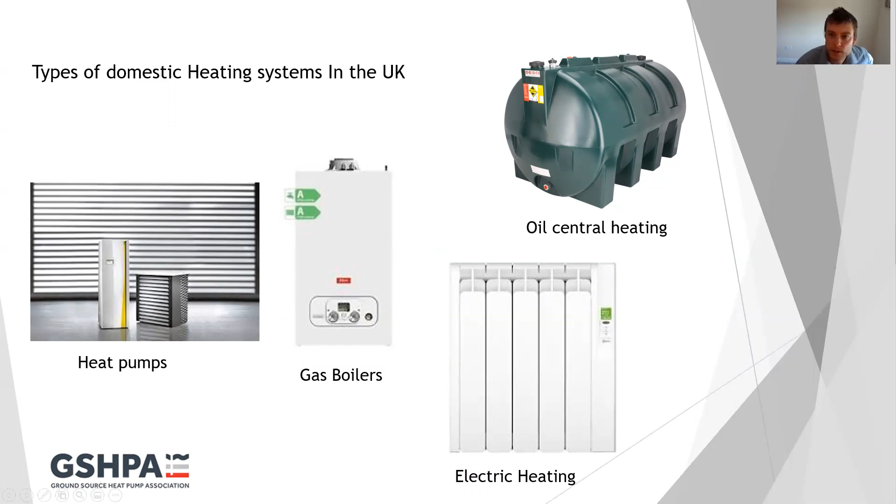Okay, how to ensure your heat pump is smart grid ready. So these are the types of domestic heating systems in the UK generally. So we've got gas boilers, gas and LPG boilers, heat pumps, electric heating via direct panel heaters, and oil central heating. This presentation is mainly to do with the domestic sector, but it can be carried over to industrial or commercial sectors. The principles are very much the same.

So this is just a little bit about how heating systems compare with regards to efficiency, so we can put them all on a level playing field. We've got gas and oil boilers. You put 1 kilowatt in. If they're an A-rated boiler, you'll get approximately 0.9 kilowatt of heat out, so they're 90% efficient. Electric heating systems, such as panel heaters or storage heaters, you put 1 kilowatt of electric in and you get 1 kilowatt of heat out. So they're known as 100% efficient.

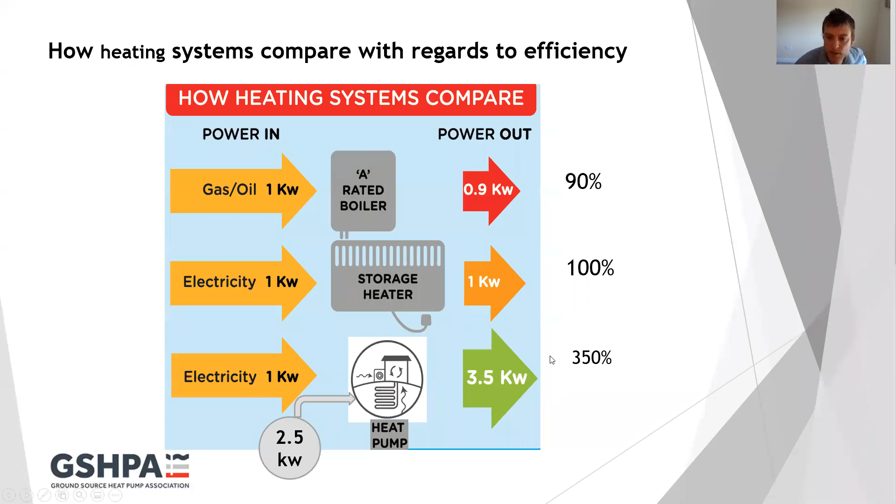And then lastly, we have electric heat pumps, where you put 1 kilowatt of electric in, but because you get 2.5 kilowatts of free heat from the ground or air, you end up with 3.5 kilowatts of heat. So they're known as being 350% efficient. So that's their efficiency, but how do they compare with regards to running costs with each other?

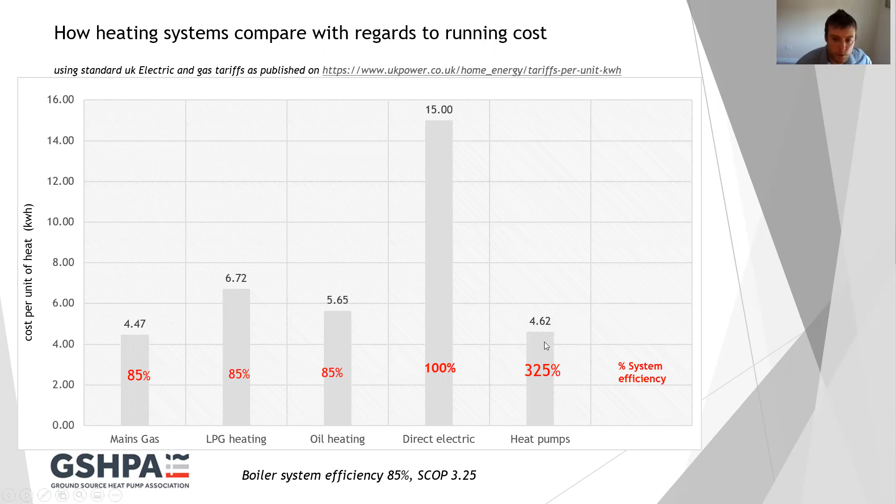So we have mains gas, which is actually the lowest form of heating cost, with a boiler efficiency of 85%. LPG and oil heating, for rural properties, tend to be higher. Direct electric panel heaters are by far the highest cost when looking at standard tariffs. And then we have heat pumps, even though they're very efficient. I've got a SCOP here of 3.25, which is pretty average. They're still slightly above a mains gas boiler, which is quite surprising. But that is to do with the cost of electricity and gas in the UK.

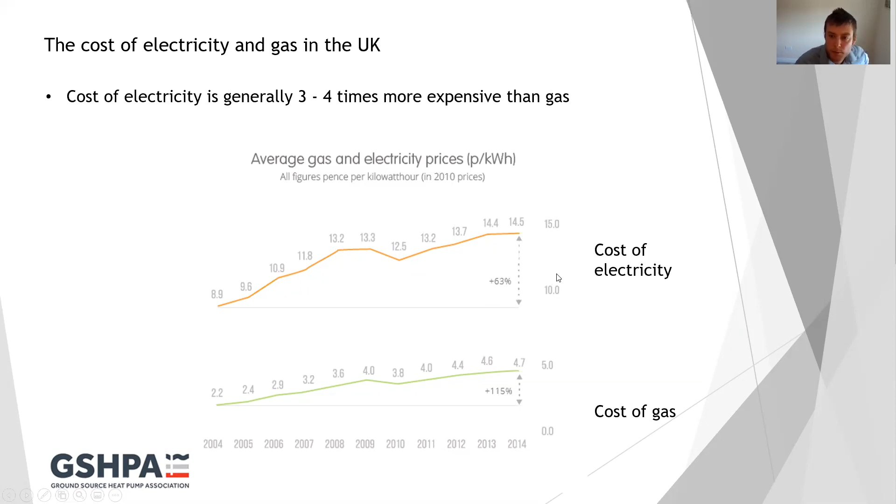So even though heat pumps are very, very efficient, because of the cost of electricity, we can see here, these were taken some 7 or 8 years ago, but the trend is pretty much the same. The cost of electricity has been, probably for the foreseeable future, 3 to 4 times more expensive than gas. So heat pumps lose out a little bit because the cost of electricity is so high. But what's changing in the UK? What's the future for the price of electricity?

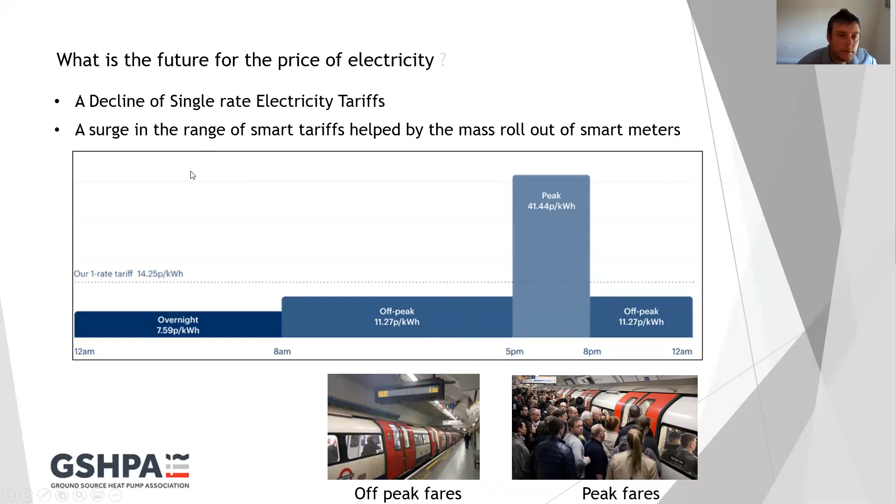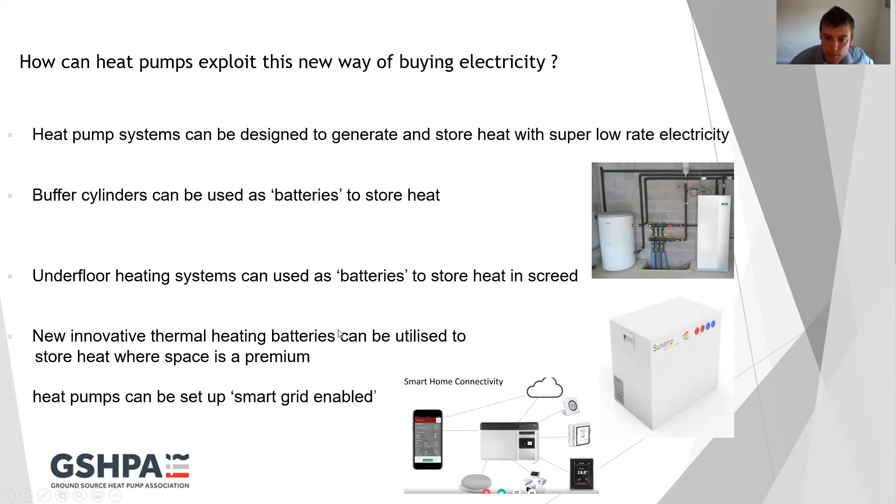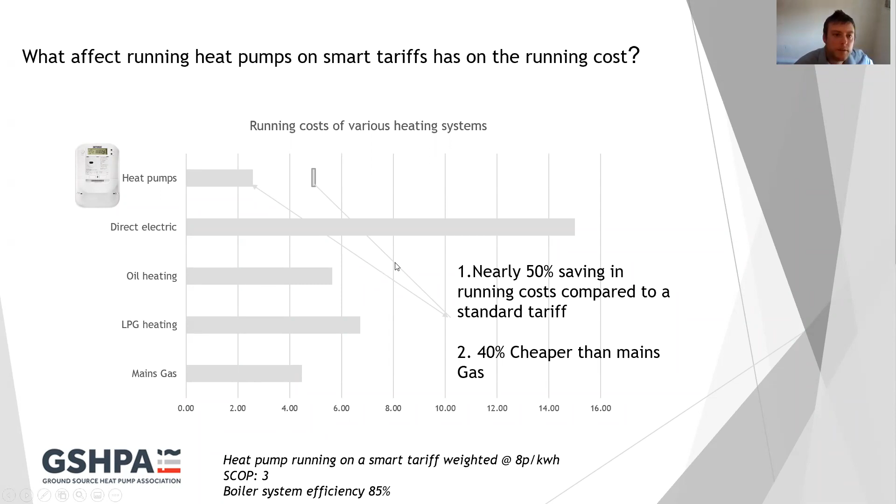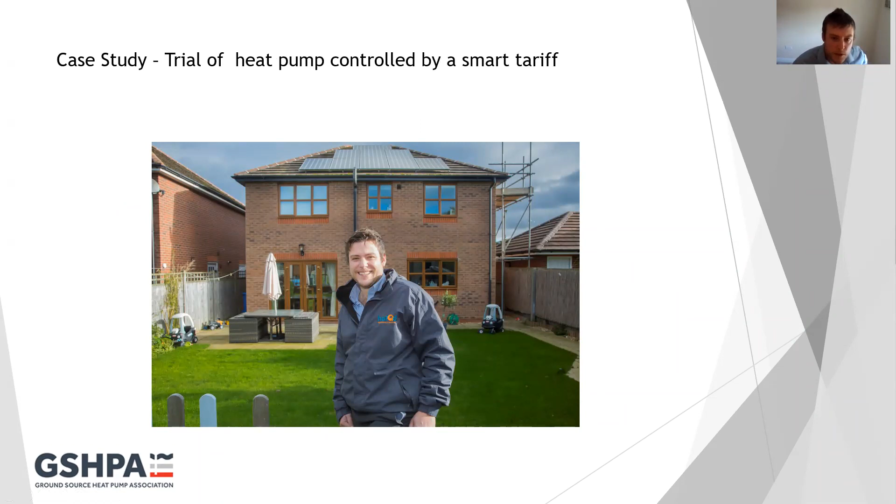So what we did, we put in a heat pump and a special retrofit underfloor heating system, so there was no digging out the floors. So we needed to look at getting some sort of thermal storage in there. Radiators don't work so well with a store, but storing heat in screed is a very good way of storing low cost energy. So we fitted a 20mm retrofit underfloor heating system with this high density screed, and this is just to show you a quick example of it going in.

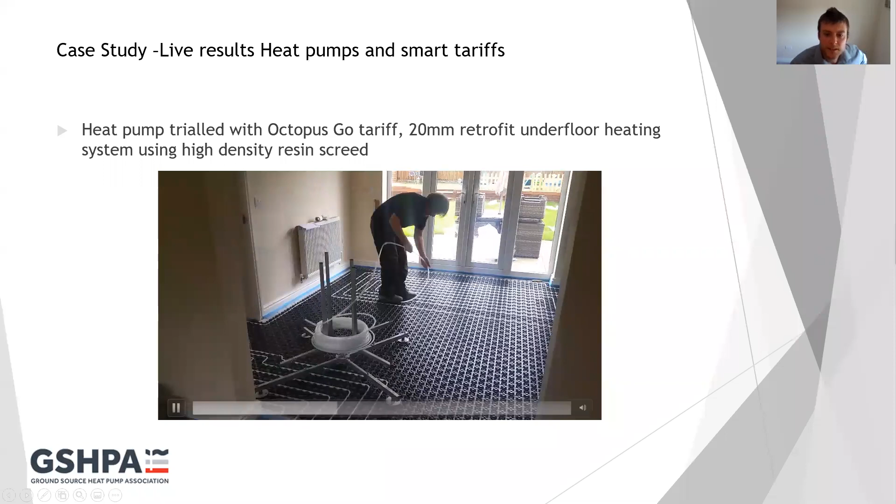Okay, so that's just an example of the underfloor heating going in, very low profile, just planing off the doors, and all of a sudden you have a very good underfloor and a way of using heat into a battery, a thermal battery type.

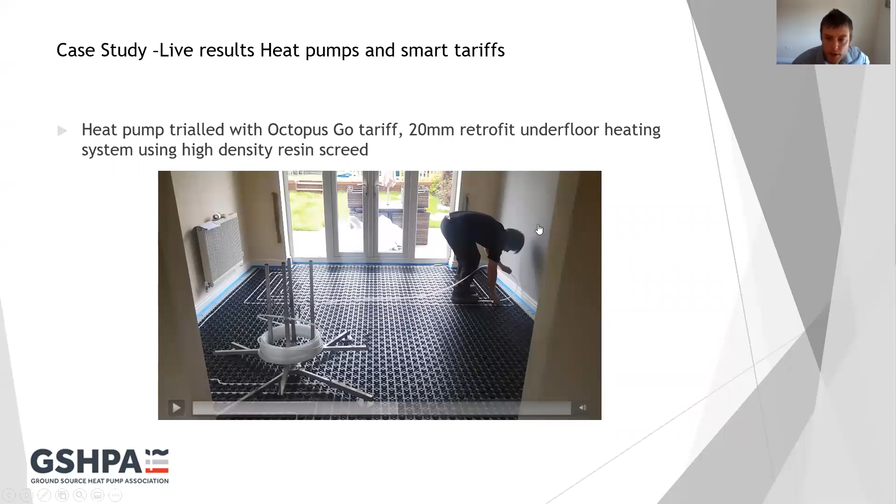So just a little bit on the screed now. So this one, by Ultraplan Maxi, is a very dense screed, so it can store a lot of energy, even at 20mm, which isn't much. If you see this example on the left-hand side here, so this is the idea.

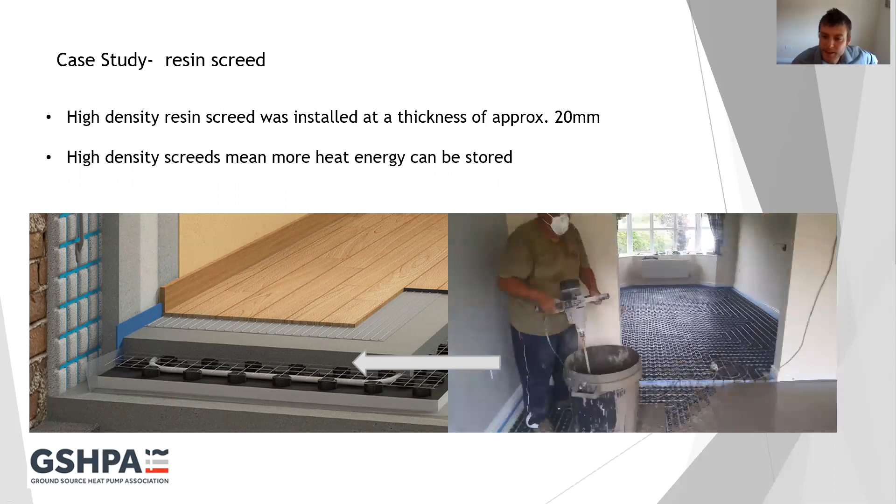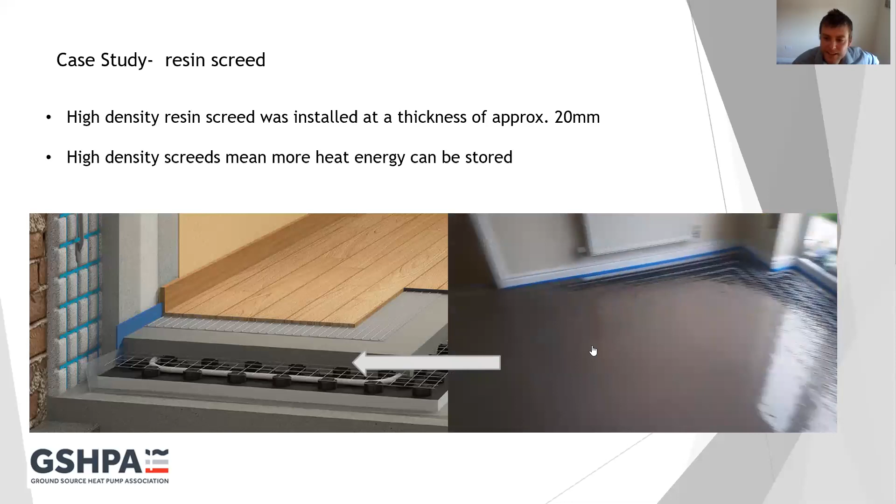We're running heat through a network of underfloor heating pipes, and in turn that is giving off its heat to the screed, which is heating as a slab, and then that radiates through the floor and into the room. And just a quick example of the type of resin screed that we install. It's mixed, and so it just gives you an idea of the job in hand. Only a 2-day install.

So these are the settings of the heat pump now, of how we use the heat pump to work with the smart tariff and with the screed. So what we did, we used Octopus Go, which is a tariff where it's 5.5p per kilowatt hour for 5 hours overnight from 1:30 till 6:30. So the heat pump is designed to charge up the screed in this low off-peak time. The peak rate on this tariff was nearly 15p, so it was geared up to use as much of the

low rate as possible. So we can see on this graph, this is what was happening when the cheap rate kicks in. The heat pump kicks in, heats up the screed, uses all the cheap energy at 5.5p instead of 15, so it's super cheap. But then, because that wasn't lasting the whole day, the heat pump was programmed to provide a further boost at approximately 3 p.m. in the afternoon, which we can see here.

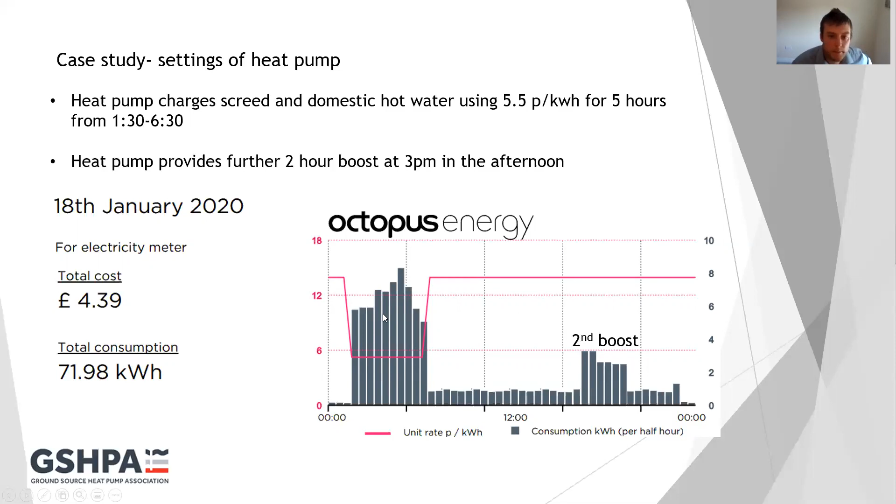This is the second boost of the heat pump using electricity to convert into heat to just lift the temperature in the house back up. And this was a day in January, 18th of January, so a pretty cold day. Some days the heat pump was able to just use energy here, but because of the heat loss in the house, they needed a second boost here. So this was using peak electricity, so 15 pence. But the idea is to use most of the energy here.

So this is just to touch on the comfort in the home and how it provided heat to the home. So this was a graph from the underfloor heating controls. So the orange is the average indoor temperature, and the blue is the outdoor temperature. So the aim of the game is to have the temperature at 21 degrees.

So what we're doing with the screed, we're letting the screed heat up to 22 and roughly fall back again to 20 degrees, so it's not too cold in the house. So we can just see here as an example. So 6 o'clock in the morning, the heat pump's really ramping up, and because there's a lag on underfloor heating, even though it's heated up at night for 5 hours, you don't see that effect till 9, 10, 11 o'clock throughout the day. And that's quite important.

So it actually suited the property quite well, because it was able to give heat when it was needed. So here we can see the peak, and then slowly going down again. I think we can annotate there. So that's when it's losing its heat, and that's when it's having its second boost. Heat up again, and then falling again, heats up again at night on the super low rate, fall again, heat up again. But the idea is to use all the energy at the night rate as much as possible.

A few other things we did: the screed temperature was heated to 27 degrees at heated times, and floor sensors were installed to ensure the surface temperature of the floors didn't exceed 27 degrees, because a lot of floors don't like you to exceed that level.

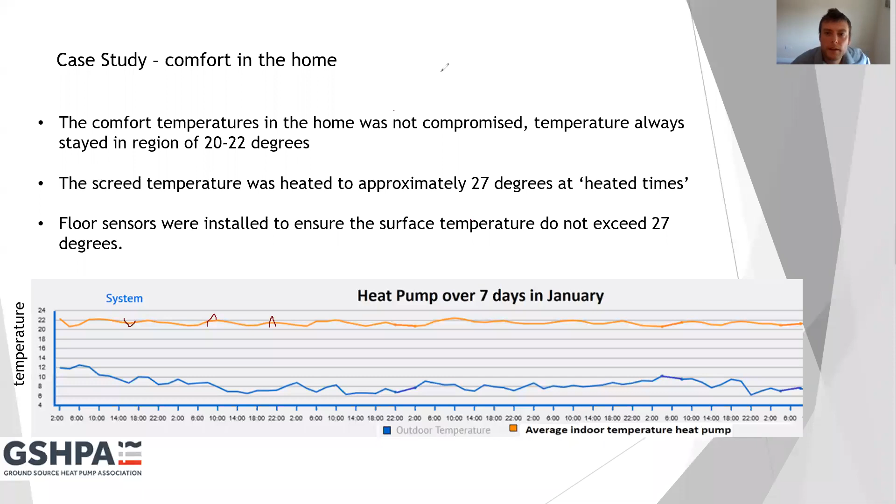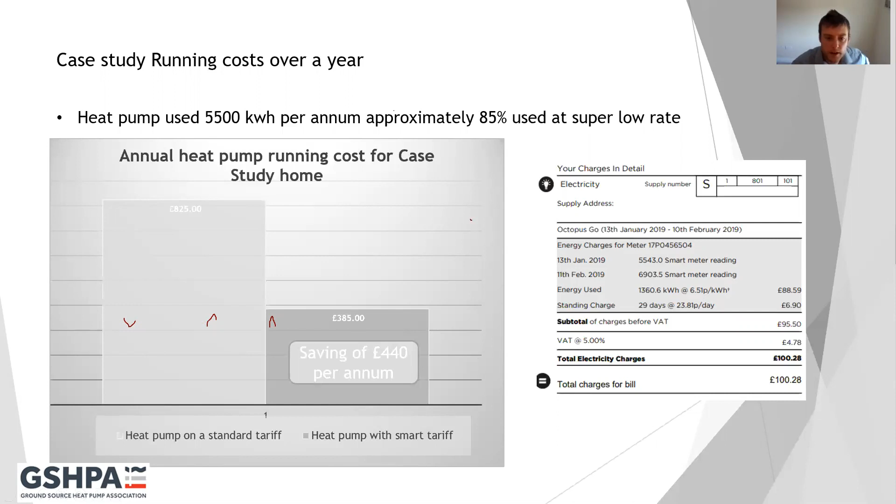Okay, so that case study used the underfloor heating as its battery. You can also investigate oversizing buffers. They can be a low-cost way to store heat. So in this example, we've got a smart meter linked with API controls. So if we run the heat pump on 5 pence per kilowatt hour, the heat pump's 300% efficient. We can quite easily store energy at 1.6p per kilowatt hour, which is a very, very low source of heat compared to mains gas and other sources of fuel. Nothing really touches it. And that's simply if you divide 5 by 3.

So even when you run at a higher temperature, 55 degrees, for instance, the smarter heat pumps that know when electricity is cheaper can run at a higher temperature. So in this example, it's running at 55, it's keeping the buffer at 50 degrees, but we only need around 30 degrees in the underfloor heating system. So you need to store at a higher temperature to make sure we've got enough energy to run at the lower temperature. And in this case, we're actually mixing down on the manifold to make this storage last a lot longer.

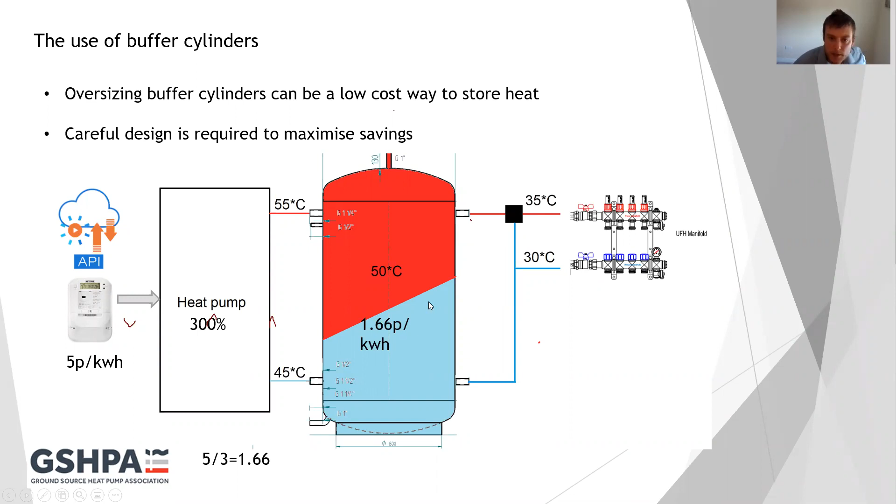Okay, so the use of thermal batteries. With buffer cylinders and thermal stores, because we're storing water, we need a lot of space in the property. These thermal batteries are an innovative idea. They do the same job as a thermal store, but they use a phase change material inside. So we're not heating water, we're heating up this material, which is storage. So it means a lot more compact and a lower standing heat loss as well.

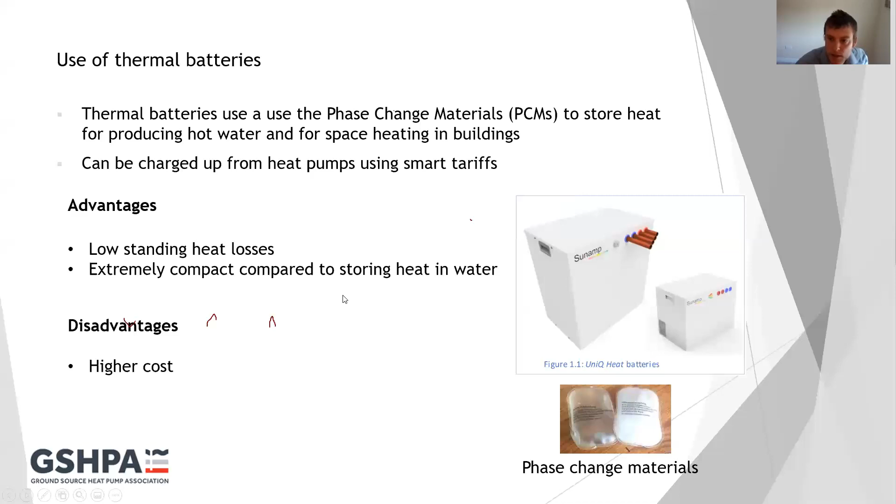So with a thermal store, if we've got 1500 litres of water, that could lose maybe 7 or 8 kilowatt hours a day, whereas the equivalent storage in a Sunamp battery would have a lot less standing heat loss. The main disadvantage is the higher cost compared to a buffer cylinder. Very expensive at the moment compared to cylinders, but if you haven't got the space, then they are the ideal.

So you could have a combination of thermal store and screed. In this example here, we've got a ground source heat pump, again, low cost electricity. So we've got two types of batteries. We've got a thermal store, just say in this example, can hold 30 kilowatt hours of storage. And we have the underfloor heating and screed, which might be able to hold 20 kilowatt hours of storage.

So this is just a touch on design. It gets more complicated than this, but if the daily space heat load for this home was 50 kilowatt hours, then we can quite comfortably charge the batteries up with 50 kilowatt hours of heat to provide heat for the whole day for this property.

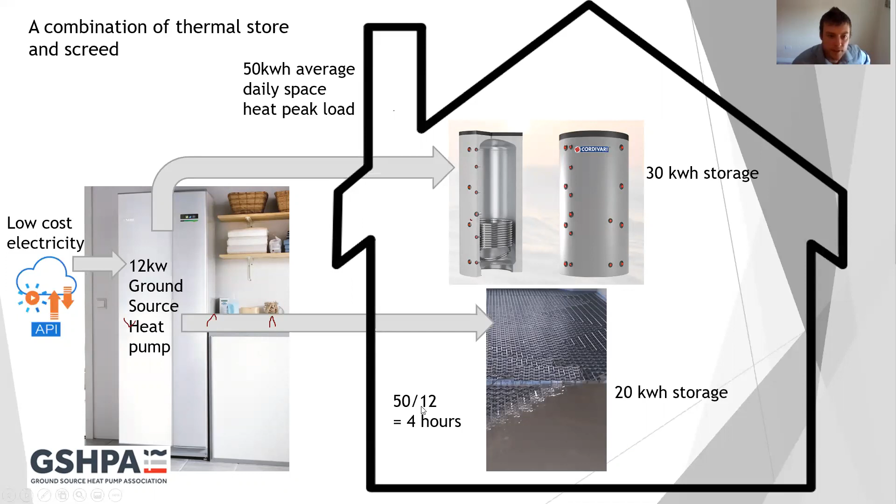So if we've got 50 kilowatt hours of heat and we've got a 12 kilowatt heat pump, we need to have a smart tariff which can last for 4 hours for this to work. So in this example, it'd be 4 hours at 5p. So that is the ideal scenario.

So smart heat pump, is it a smart investment? Well, this is just to touch on the installation costs of a ground source heat pump example. So with the standard setup, you're probably already looking at in the region of 17,000 for an average heat pump. But to enable it to be smart, that could be choosing a heat pump with good controls, smart controls. It could be fitting a larger buffer cylinder, could be fitting a heat battery, could be installing slightly more screed to use the battery.

But if we call the average cost £3,000 more to make it smart, that's quite minimal in the scheme of things. And we already saw from the last case study that there was £440 saving in the first year. So if we look at that over the lifetime of the heat pump, which is 25 years, we can save £11,000 on running costs, which is a profit of £8,000 on the initial cost of £3,000. And that's on smart tariffs alone. There's other ways we can save money, but that's just on smart tariffs alone.

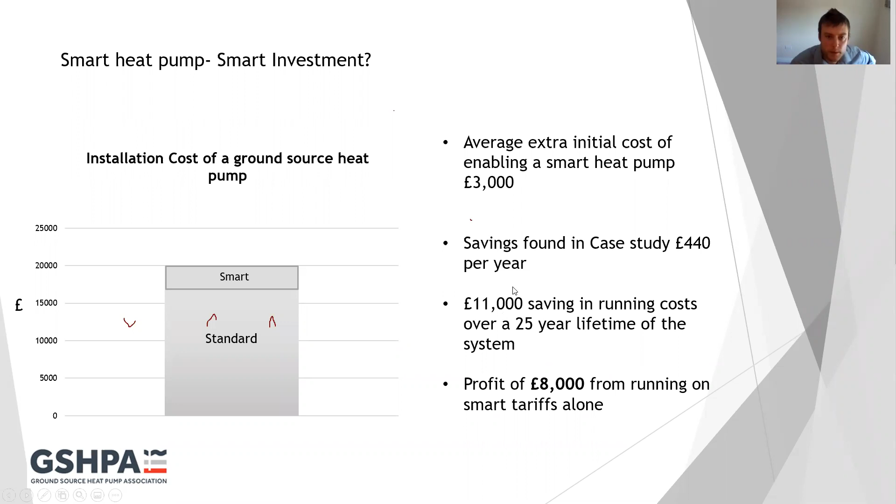So once you've designed a smart ready heat pump, the benefits are endless. There's different things you can do. So once you've got the battery, the thermal battery, the thermal store, or the screed, or the controls for the heat pump, you can benefit from the lower running costs, as I've mentioned before. It can integrate with other technologies such as battery storage.

So in this example here, we have the battery storage system. This is a Tesla Powerwall. So this is charging on off-peak electricity here at night again, and then it's providing energy for the home in the morning. And then this particular property was coupled with solar. So the solar then charges the house and battery, and then the battery discharges to the home and the heat pump in the evening.

So in this example, we're using all the energy overnight on this Octopus Go tariff they were on, and not using any energy in the day, and that really is the aim of the game, because if you can buy energy at 5p or 6p, you really are saving a lot of money compared to buying energy on a standard tariff.

Some other benefits: you can earn income through negative energy prices, if the system is set up. This is becoming more and more common now. So we're seeing negative energy prices, which are quite difficult to get your head around, because we've been buying energy as normal for the last 70, 80 years. Now is the time where we're seeing energy companies paying consumers through smart meters for using energy. It's happened in industry for some time, but domestic customers are actually being paid.

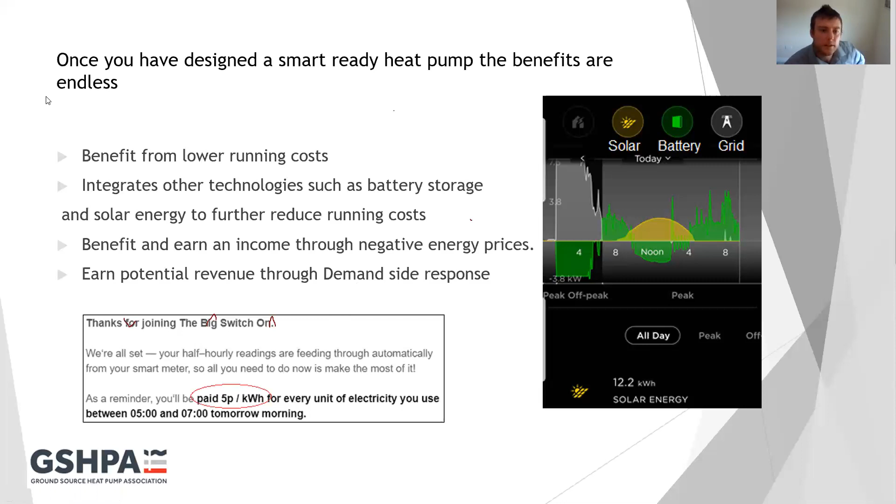So a smart heat pump is very smart, very positive for the environment. On the right hand side, this graph is showing just heat pumps in general, not talking about smart tariffs. But we can see electric heating on its own and gas are very similar at the moment, and they're emitting about 250 grams per kilowatt hour of emissions.

But the great thing with heat pumps, we can see here at different COPs. So this is the efficiency of the heat pump. So we can see a COP of 4 is a greater heat pump efficiency. So it's far less carbon emissions than gas or electric, and that's even without talking about smart meters.

But a smart heat pump can help stabilize the grid. I might have touched on this earlier, but this graph, and sorry for all the graphs, the important thing about this one is from Drax. This was on the 24th of May, so Sunday. The price of electricity here, this is the most important thing, actually went negative to £65.94 per megawatt hour, which is equivalent to about 6.5 pence a kilowatt hour.

Now that is quite alarming, really, that the energy suppliers are actually paying so much to get rid of their energy, that there was a glut of solar and wind, coupled with low demand, and this is going to happen a lot more often. We can see the emissions at the time were 24 grams per kilowatt hour, which is absolutely minimal. So if we can have enough heat pumps to take this power and use it flexibly, this is going to be the way forward.

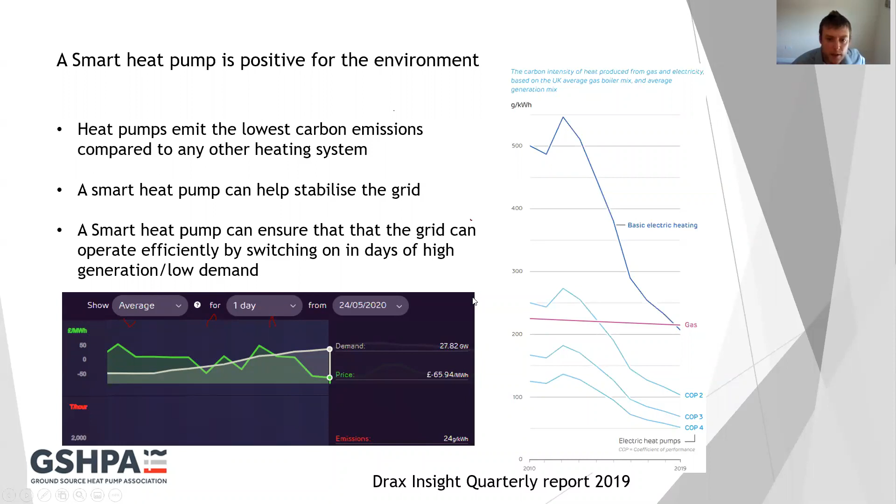This is just to say it is a tried and tested technology, this idea of storing heat through electrification. Storage heaters have been around for 50 odd years, and they were designed with the Economy 7 tariffs to heat up overnight for 7 hours, mainly for coal power stations in the 70s and 80s that couldn't turn off very easily. It was far cheaper for them to give the electricity away for half price, and for people to store up the energy in their homes. So the idea of what I've been talking about has been tried and tested, and has worked very well.

The problem is with the UK, we generate a lot of wind. There's a lot more wind and solar coming online, and we don't know exactly when this energy is going to be providing power. You can't predict the wind, so when that is really running hard, we've got a lot of energy, as we saw with the negative electricity prices. And because we're an island, we can't really get rid of our electricity. We've got some small interconnectors, but compared to Germany and France, we do struggle to export a lot of our energy. So a lot of the time it can be wasted.

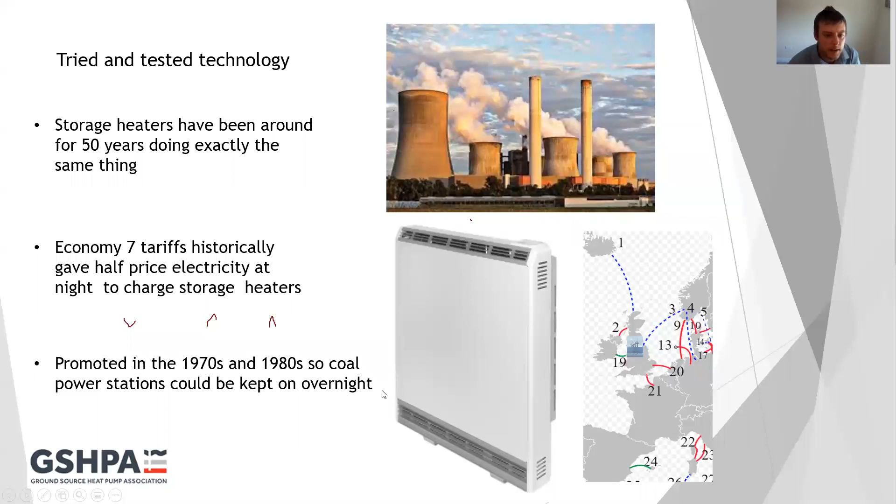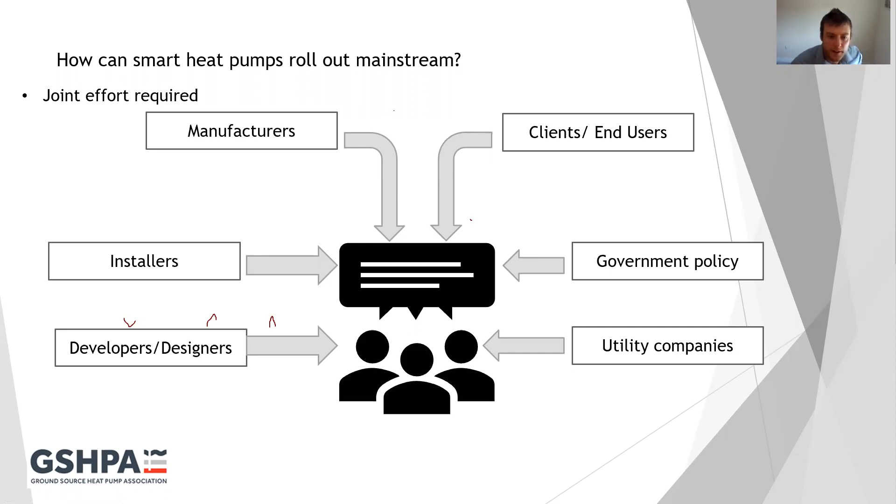Thanks very much, David. I've been noting the questions that have come in the chat. Quite a lot of comments, so what I'm trying to do is summarise some of the discussions for you, and perhaps ask you to comment a little bit further, David. Is that okay? Yeah. So Roger Macklin makes the very pertinent point that you've got to be careful in saying storing energy in an underfloor system, because that has the implication that you could perhaps recover that energy and use it somewhere else. So I think that's just really a comment on that. Would you like to make any points on it?

I mean, obviously in the summer, it's a boiling day today. It's not really going to be a day like today you're going to be storing energy in underfloor heating, so it's mainly looking at the winter. It's a very good way of storing energy in a screed. I'm not sure what he means by going anywhere else. I think Roger's making the point that we're using the underfloor, the screed, as a thermal mass rather than as a thermal store. Yes. I mean, they're very similar in a way. I say that the underfloor heating is like a thermal store. Yes, you're right. It is a thermal mass as well.